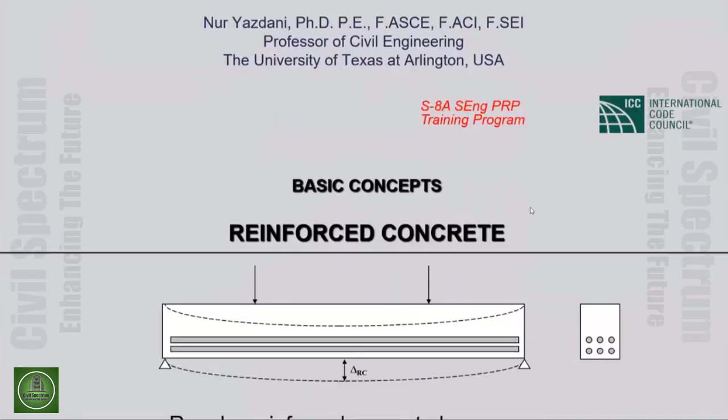So let's start with the very basic stuff here, reinforced concrete, as Dr. Ghosh may have been speaking about in the last few sessions. We know about reinforced concrete. What's reinforced concrete? Well, this is a regular reinforced concrete beam.

Typically we show simple supports, but in practice we rarely have simple supports, as you know. In my class teaching reinforced concrete, I talk about simple supports, with a roller and a hinge. One student asked me, 'Sir, I went to practice and couldn't find a roller or hinge in practice.' I said, listen, that's an idealization - we really don't have a roller or hinge in practice. We simulate that; for example, in a bridge we can have an elastomeric bearing pad that simulates a roller support. But anyway, for an idealized case, this is okay.

So here's a simply supported beam with 2 point loads, and here's a typical cross-section of reinforced concrete. As we know, these are typically steel rebars, with 2 layers here. The main reason for providing steel rebar is to negate the weak tensile capacity of concrete.

Under positive bending moment, as you can appreciate, there will be tension in the bottom of the beam and compression on top of the beam. So concrete is reasonably strong in compression, but quite weak in tension. And that's typical of a brittle material.

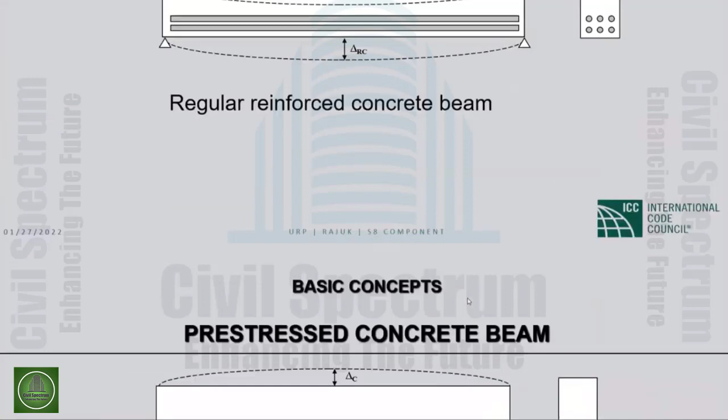So the difference from the previous slide, where we had a lot of deflection, now the deflection will be much less. And in some cases, there may not be any deflection at all—the beam may still remain in a negative moment situation. So why is that useful? Well, now, because of that pre-built camber, the deflection going down is much less when the load is applied. Bottom line is that we should be able to get quite a bit more capacity from this beam.

So why is that useful? Well, first of all, you can imagine that because of that pre-compression in the bottom of the beam, the concrete tension will be reduced. So the stresses in the bottom fiber of the beam will be significantly reduced because of the pre-existing compression. So compression in the beginning, and then applied tension—addition and subtraction will make it less.

So the tendons must be eccentric. Eccentric means that we don't want that compression to go to the centroid of the beam. You can, of course, make concentric pre-stressing, which goes to the centroid, which in a rectangular beam would be at the center of the rectangle. But it's much more effective if we apply eccentric pre-stressing. Eccentric means that you apply the pre-stressing off center from the centroid of whatever section we have—I-beam, T-beam, or rectangular section.

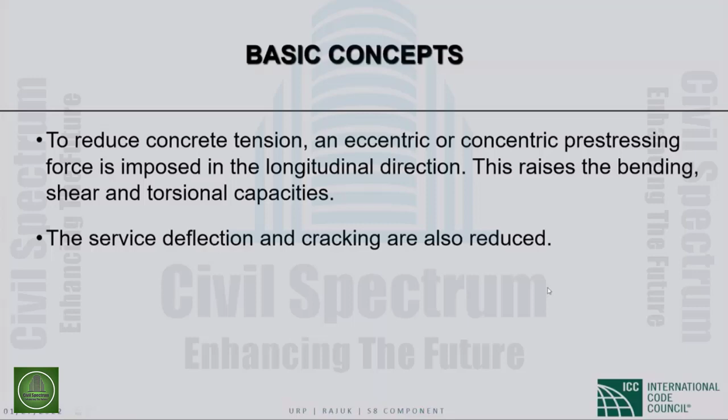In one shot, we can cast about even 10 beams, depending on the span of the beam. That's really effective. The strands are fed through the bottom flange, go all the way to the end, and are stretched. This is called pretensioning. Then the strand is let go after this concrete hardens.

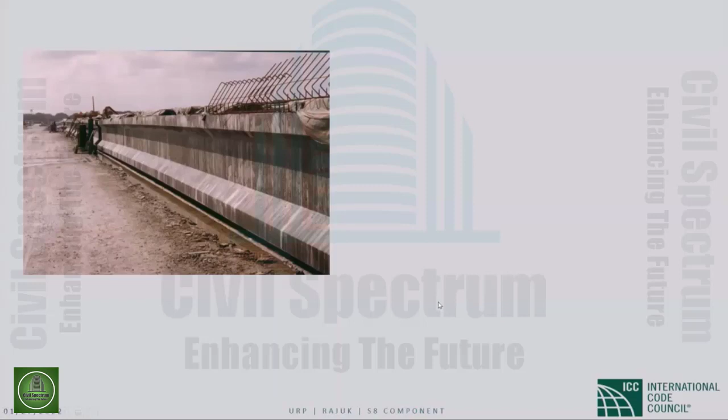So here is another beam. This, as opposed to the I-beam, is what we call a ledge beam. Why is it called a ledge beam? Because you can see the ledges on two sides, right? So you can see the pre-stressing strands here very clearly. If you look closely, you'll see these are not really one solid strand, it's made out of 7 wires. So typically we call it a 7-wire strand, and there are many of them here in the bottom flange.

This is used typically in a building where there are floor beams which come from the side and rest on this ledge beam. Very simple construction. The floor beams are simply supported, while these can be simply supported or they can be continuous.

So you see here, if I'm in a classroom, I would ask the students, what's going on through these pipes? Some of you may know, right? So these pipes are feeding steam onto the member. And typically once the steam is released, it's covered by fabric.

So this whole concrete is steam cured. What's the advantage of steam curing? Well, we know the hydration of cement is very important in concrete. The more the cement hydrates, the better the strength. Typically moist curing is done about 28 days, but steam curing can cure the same amount of cement in about 24 or 48 hours.

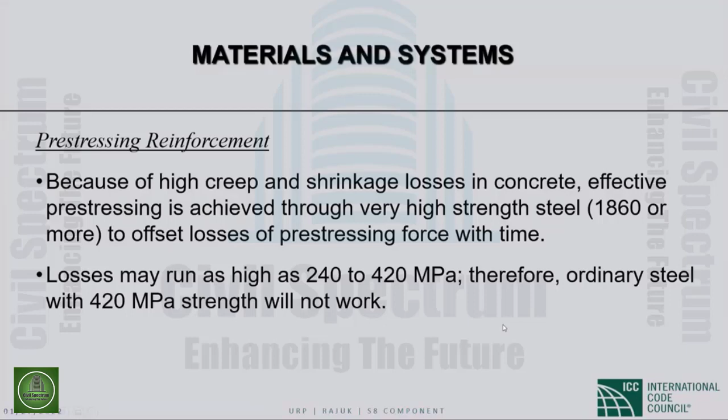So nowadays, the question is, do we have to use steel? No, not necessarily. As you know, composites are available now. There are reinforcing bars made of CFRP or GFRP, and there are also prestressing tendons available in composite.

So the advantage is that the composite will hopefully never corrode. They cannot corrode because they are non-steel. There are some thoughts that they may degenerate with time - the composite may degenerate, but that's a different issue. So the corrosion potential is wholly removed. One advantage of the composite reinforcement is the cost, the life cycle cost, right?

We talked about durability and sustainability of the structure in the previous slides. So we should not really look at the initial cost of the structure. If you think about the cost of steel rebar versus composite rebar, well, of course, the steel will be much cheaper because steel is widely used and widely produced.

With time, hopefully composites will take hold and the price will go down. Composites are quite a bit more expensive than steel right now, but if you look at the life cycle cost of the structure, it's a no-brainer. In an aggressive environment, if you have to repeatedly intervene with rehabilitation, repair, inspections, or even replacement, that may not be cost effective in the long run. So you need to look at the cost benefit ratios, and from that angle, composites make sense.

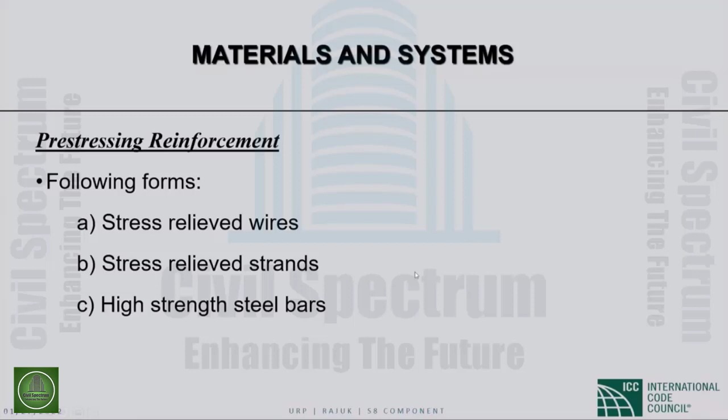But there's something that the designers or owners can decide, what kind of steel to use. Just enough to say here that composite pre-stressing steel is available for us to use.

So I talked about the two types of pre-stressing systems: one is pre-tensioning and one is post-tensioning. There are structures that are hybrid, where the structure can be partly pre-tensioned and partly post-tensioned. I will talk about that a little bit later on. Or the structure could be wholly pre-tensioned or wholly post-tensioned.

Sorry, somebody's calling on my Teams phone here in the office. I apologize for that.

So here are some points on pretensioning. As I mentioned before, we have fixed anchorages, bulkheads on the sides. Before the concrete is cast, we place the tendons there, then we stretch it, and then we anchor it against the bulkhead. So you can imagine that the tendon is still in tension.

It is normally done at a precast yard, which is really cost effective in terms of the management of casting, storage, and transportation. Or for large jobs, it can be done on the site. It's not unusual in the USA for large bridge projects to have a temporary precast yard set up at the bridge site, which really cuts down on the amount of transportation needed.

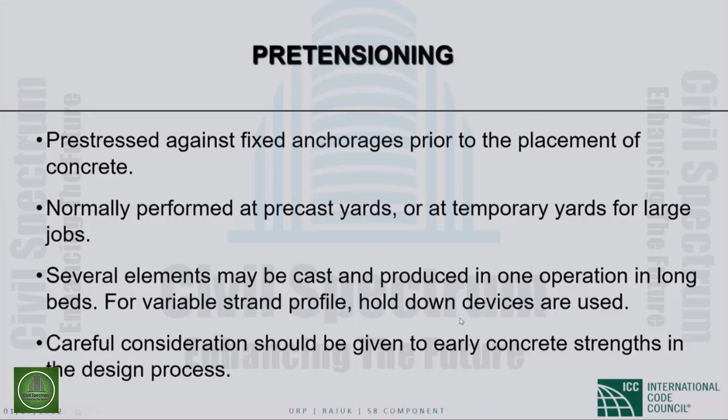There is no meter. We just measure the elongation of the tendon, and there's a calibration chart. If this is elongating by 500 millimeters or whatever, then what's the corresponding force in kilonewtons? That's known from the manufacturer. So that's what we do, it's a very simple process.

I have some photographs, I don't have them here in this lecture. I probably will include them in my bridge lectures later on, where you can see how people are measuring this. Now, this is a very, very, very risky practice.

I shouldn't laugh, because people have lost fingers operating this jack. Suddenly a strand breaks, and strands can be defective due to manufacturing defects. So this flies at high speed, causing injuries to people standing nearby. That's a very risky practice, staying close to this. I'm sure precasters take proper precautions, and there are liability issues that are addressed.

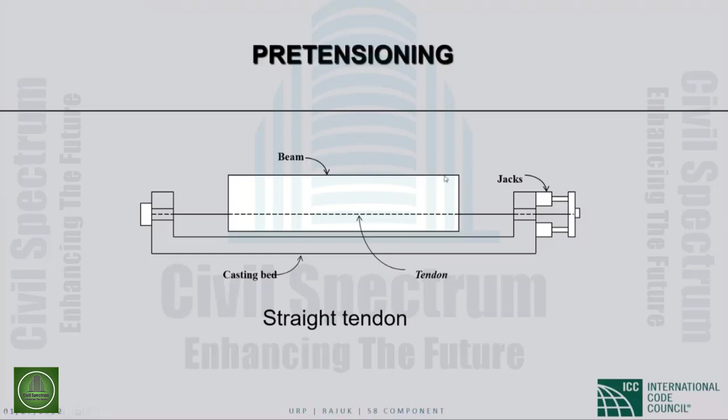This is easily done in a precast yard. It can be difficult to do in the field, but in a precast yard, it can be easily done.

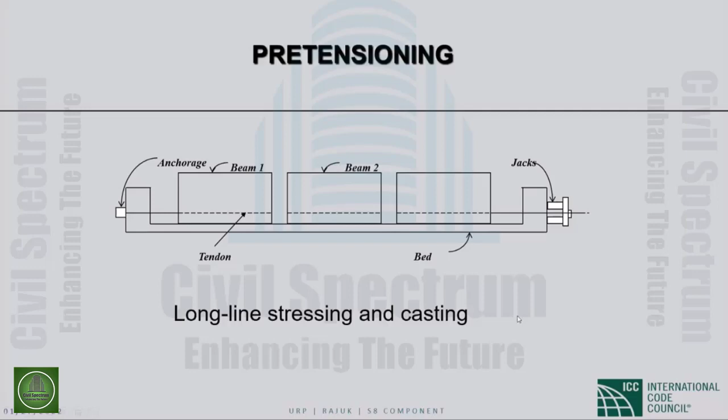As opposed to pretensioning, post-tensioning is done on hardened concrete. So instead of having the strand bonded to the concrete, what we do is place things differently. Let me see if I can move this around a little bit so it doesn't obscure our view.

Strands are placed in ducts. So what we do is place empty ducts, like a conduit. It can be made of steel or plastic. These are placed in the formwork ahead of time, before the concrete is poured.

After that, we apply the concrete, casting it around the duct. You can imagine there's an empty duct within the concrete, a void in the concrete, and we can even vary the profile of the duct to conform to the moment diagram. Once we apply the concrete, it hardens.

Then we feed the strands through the duct, all the way from one end to the other. We anchor it on one side, and apply the pre-stressing from the other side. There are grouting ports into the ducts, and we typically grout it, injecting grout from one side. The grout comes out the other side, so we know the conduits are fully grouted, giving us the bonding we desire.

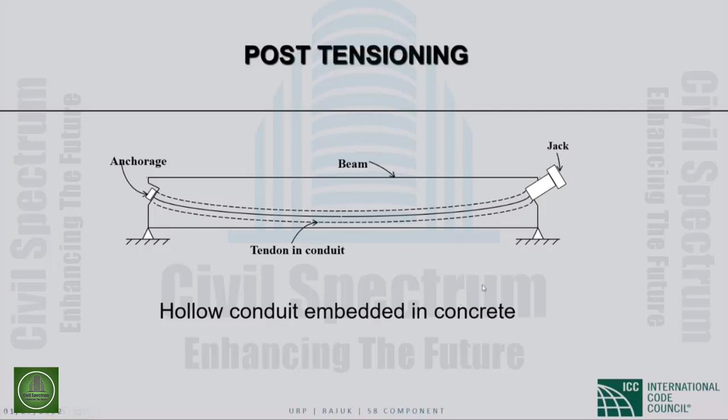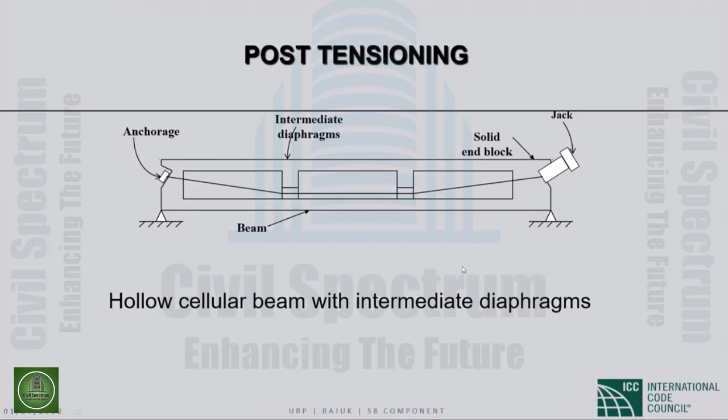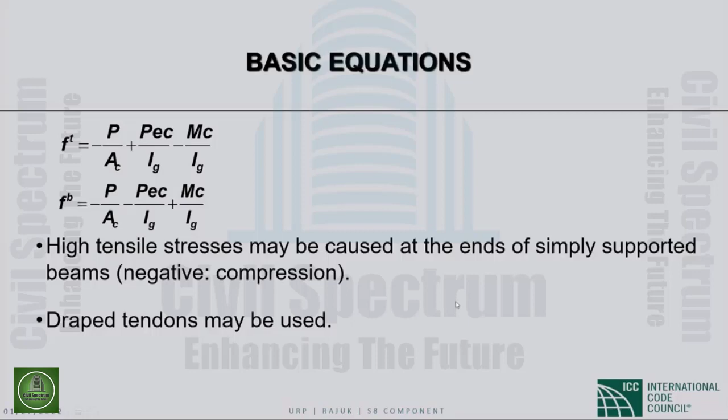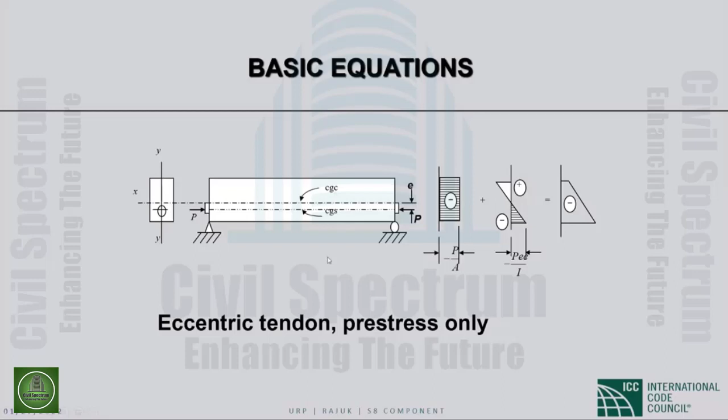These will again work against each other. It will reduce, and these will add, so this will be a kind of trapezoidal stress distribution on the section. This is only pre-stressing, nothing else applied, which is hypothetical because you can easily imagine when the pre-stress applies, the member cambers up and the dead load self-weight takes effect immediately. There's no way to avoid that, especially if you're supporting at the end, so it's instantaneous—the moment pre-stressing is applied, there will be downward load from the self-weight.

Which may not be desirable, but we can accept some limited tensile stress at the bottom of a pre-stressed beam. This is the condition which happens after pre-stressing transfer to the concrete beam.

Now let's think about the life of the structure. I always believe in looking at the sequence of loading on the structure. It's very important. Sometimes as a designer, we forget that the loads are not applied at the same time. There can be lag in the loads applied.

So let's think of the life of this pre-stressed beam. It has been cast, and it may be lying somewhere in a precast yard on the side. It's not unusual to sometimes have them stacked up one on top of the other, because in the yard they're trying to save space. If it's at the site, it's probably being placed in service. So from the precast yard, we'll be moving them to the job site, at the building or a bridge, or at the temporary site, we'll be putting them up.

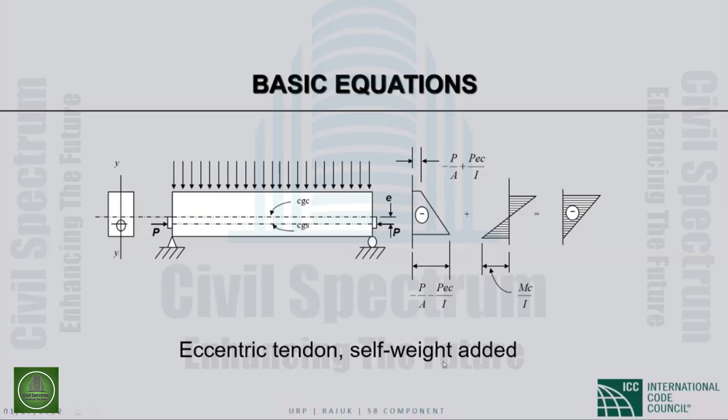So here is that beam I showed you before. Now it has rained, which is helpful for the curing, though it probably doesn't need any because it has been steam cured. So we can see again the long line casting here, and we see several strands.

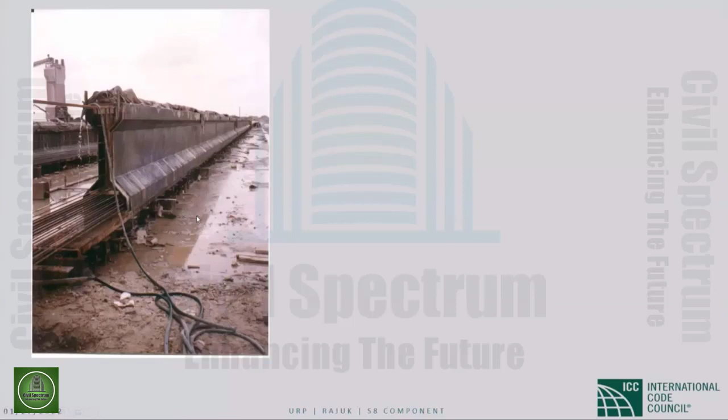I like to point out that this is very important, the placement of the steel and the constructability of it. ACI addresses that, as you know, through providing covers, minimum covers for concrete, and then also providing clear spacing between rebars or layers of rebars. Now, we should not use the same values for pre-stressing. They're quite different, and I like to point out that in ACI there are separate values for pre-stressed concrete, which is different, most likely lower than reinforced concrete.

So now coming back to the equations. After the beam is put into service, we consider a total moment. So as I mentioned before, it's in service. This is a condition where the beam has been placed into service. Everything has been placed. The structure is complete.

So the moment on the structure now would be the summation of all the moments. This is the external moment applied, not the pre-stressing moment. So the total moment would be the dead load moment, or self weight of the beam or the slab together—this is the superimposed dead load moment—and this is the live load moment. So it all depends on the support condition of the structure. That will dictate the values of the moments, and then also the load factors that have to be applied for concrete design.

So the load factors are interesting. I think Dr. Ghosh may have covered that in the previous sections of this lecture series. The load factors do not depend on whether the member is reinforced concrete or pre-stressed concrete—that only depends on the type of load you have. And as you know, there are load combinations in SEI, which are statistics based. We typically use those factors and wisely look at the load combinations we have to use.

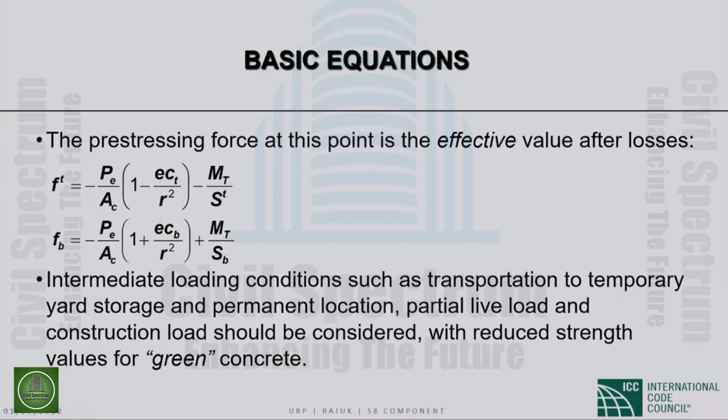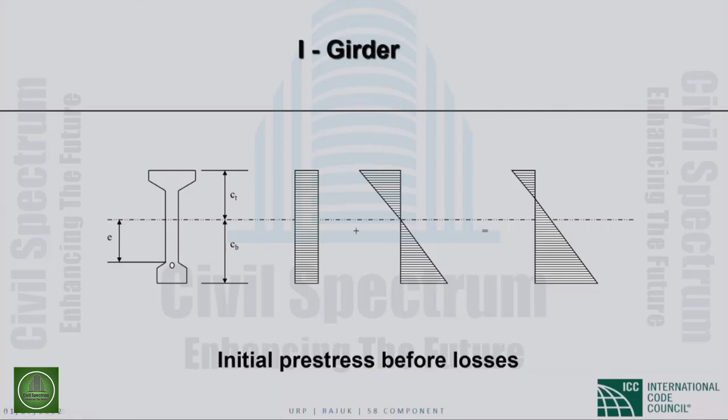Now this is service load at effective pre-stress. So the pre-stress has been reduced by the losses, and then we apply the other loads on the structure. Suddenly we have a little bit of improvement in the condition. This stress has been reduced a little bit, and this stress has been also changed. That's why ACI applies stress limits. There are two kinds of stress limit: one is for the initial condition, and one is for the service condition. They are different, and ACI indirectly recognizes these kinds of situations through those stress limits.

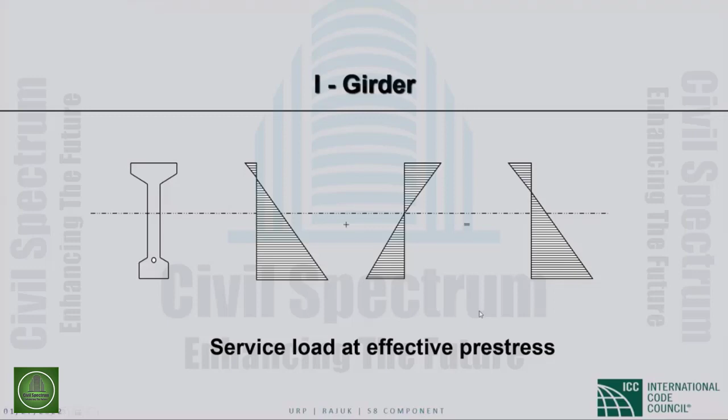So now we can fall back onto ACI code 18.4. If you have it, you can look into the ACI code if you have a copy, or you can look online. I found ACI 318-08 metric online. Initially I was trying to buy it from ACI and it was quite expensive, so I got it kind of free. Google is our friend, right?

So here is the stress F prime CI, as I mentioned before, compressive strength at initial pre-stress. Please be familiar with this nomenclature, this subscript. I means initial, and F prime C is the compressive strength at service. It makes sense, right?

ACI gives us the limit. This is very important - these kind of stress limits are not in regular reinforced concrete in the ACI code. They are only in pre-stressing because pre-stressing can drastically change the stress situation depending on the support condition and the eccentricity. So if the specified stresses are exceeded, ACI asks us to use bonded auxiliary reinforcement. We must provide additional steel reinforcement, mild steel, which is supposed to supplement the pre-stressing steel and address all these unintended stresses that we need to control in pre-stressed members.

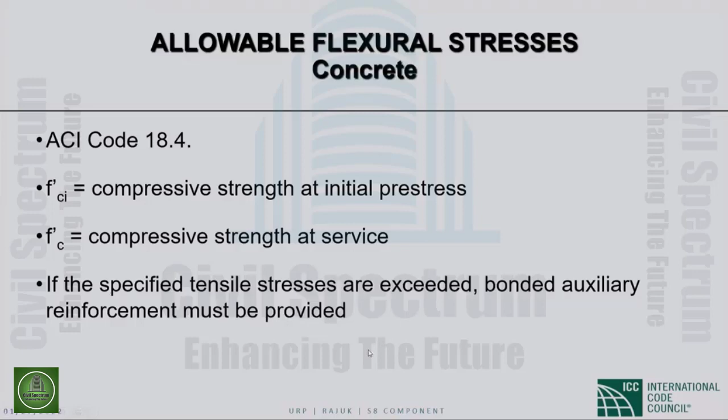So these are the stress limits. By now you understand the difference between transfer and at service load. To repeat myself, transfer means initially when the pre-stress is transferred, and at service means when all the loads are applied and the member is in service. ACI does not recognize intermediate load cases, as I mentioned before.

So in compression, the limit is 0.6 F prime CI anywhere. If you have a compressive stress, this is the limit, and F prime CI is the initial concrete strength. We collect cylinders during casting, regardless of stage, and then test some of them initially, depending on when the pre-stress is released - if it's steam curing, we've been doing it at 2 or 3 days. Then we test the rest of the cylinders at service, which would be 28 days typically.

At the end of simply supported members, this is the limit, 0.7 F prime CI. Now these are in metric, in megapascal. If using the US system, that would be in KSI, with different factors applied.

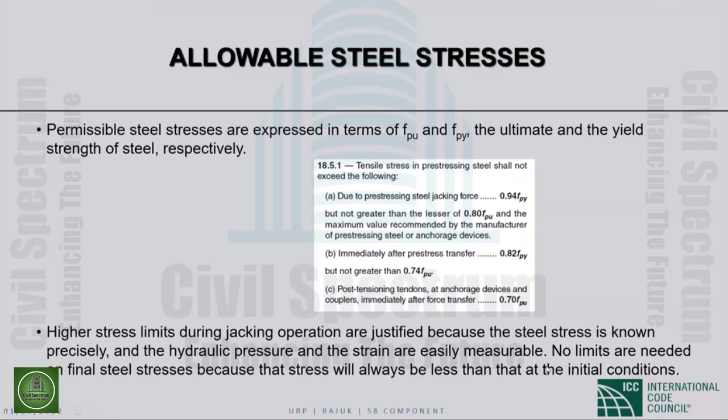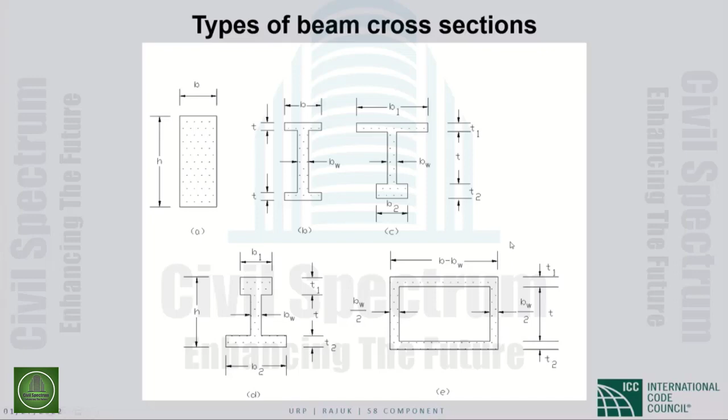Now, when you start designing pre-stress concrete, sometimes you grope in the dark. What shape should I use? Should I use an I-beam, a T-beam, or a double T-beam? A one-way solid slab, hollow core slab, or two-way solid flat plate? I'm sure you know the difference between a one-way solid slab versus a two-way slab - I think Dr. Ghosh may have already covered that.

Hollow core slabs are precast slabs where the core is hollowed out. Very common in the USA for office buildings and hotel buildings where you try to reduce the self-weight. One issue with concrete structures is the dead load - self-weight is quite high compared to steel or timber. So anyway, we can reduce the self-weight, and it's economical for us. Flat plate means, as you know, there are no beams applied, though there may be column capitals or stuff like that, and there's also flat slab.

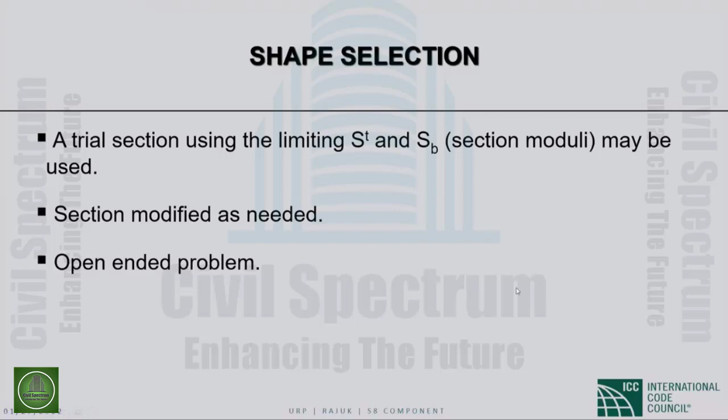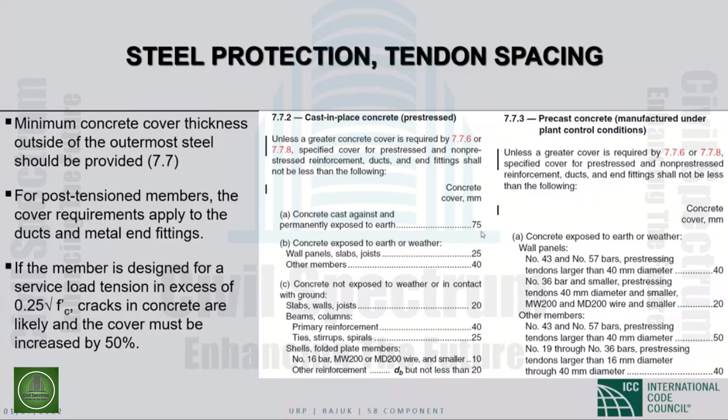This cover is one part of the durability aspect of the concrete, but then the minimum spacing is also important. The clear distance between bars and strands should be the diameter of the bar or 25 millimeters, whichever is larger. That's also important because of the prospect of congestion of rebars and difficulty in placing concrete, which can cause honeycombing and strength and durability issues.

So at the end of pretension members, the spacing requirements are increased by ACI. These are all ACI provisions, I think this is from section 7.6 here. So please pay attention to that, and if you have the ACI code, you can look at those pages.

And if you are using bundling bars, bundling of tendons - 4 tendons or bars is permitted, not more than that. That's probably more prevalent in post-tensioning than pre-tensioning.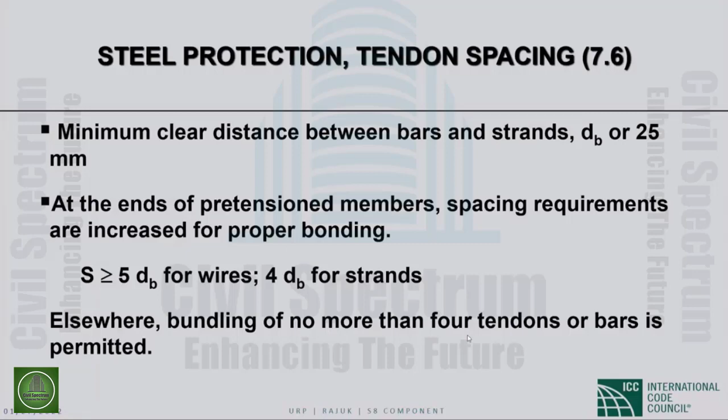It's quite common now in the USA - there are very long spans being built with this kind of bridges. Also, I like to point out that you can provide curvature of the structure sideways by using the match casting of the segments. Building-wise, well, here is a common construction.

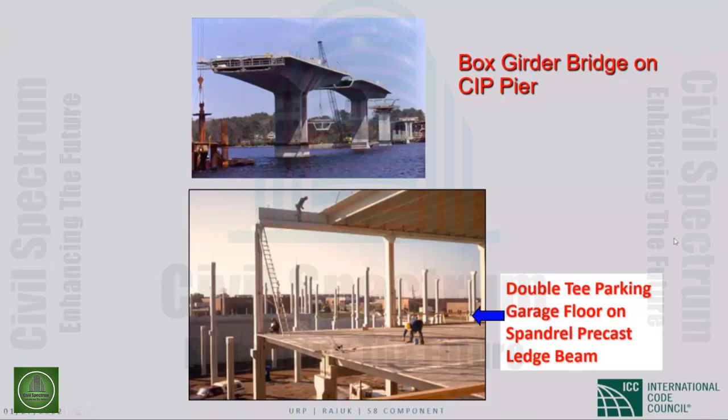Very fast construction - there are corbels on the column which transfer the load from the ledge beams onto the column. ACI, as you know, also has provisions for bracket and corbel design. Then the load is transmitted to the foundation. Very fast, very economic construction.

Now let's change gear here. With the limited time we have, let's look at the loss of pre-stress. As I mentioned before, losses are pervasive - you cannot avoid loss. So if you can't avoid something, you have to live with it. Pre-stressing will lose stress over time.

Approximately 5 years. Studies have been done and ACI has curves that show that after 5 years, the losses level out. If you provide for that in the effective pre-stressing, you should be in good shape.

Now, I like to point out that although ACI and AASHTO have detailed calculations for the different components of losses, and you can spend all day figuring out those losses, they are very difficult to understand because there are many interrelated issues. For example, there is humidity in the air, temperature effects, and interaction between them and the camber. It all makes it very difficult. And camber is very hard to predict. We can try to predict camber, but it's very difficult at the end knowing what the real camber is. I'll talk about camber in a future slide here.

So most of the time, we end up using reasonable lump sum loss estimation. It's not accurate, but it's conservative. Of course, if you have an efficient computer program, you can do the detailed loss calculation pretty easily, but we can get away with the lump sum loss also with reasonable accuracy.

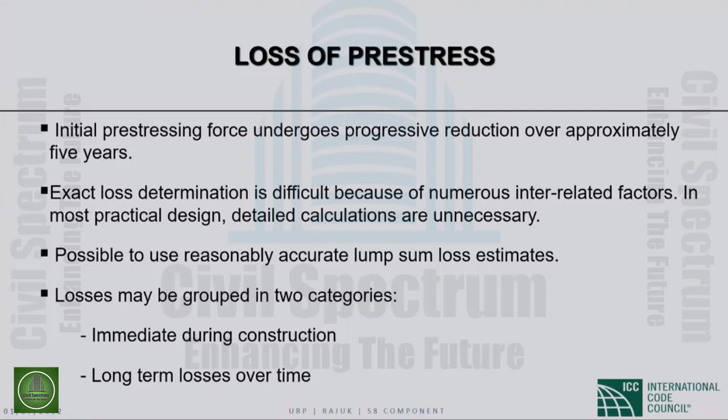ACI code does not have lump sum loss estimation. There's nothing there. There are other publications which address that. AASHTO has a table for lump sum loss. The ACI code is for building design, and AASHTO specifications is for bridge design, so we shouldn't intermix between them. And the Post-Tensioning Institute in the USA also has published such tables. So it's really up to you how you want to handle the pre-stress loss calculations, but these are guidelines that we can fall back upon.

So let's talk about the individual losses. First one is very simple, elastic shortening loss. This is instantaneous, immediate loss. We have the member, the pre-stressing is applied, initial pre-stress, note it's immediate. Then the member shortens - of course the concrete will shorten, right? It will be compressed because of the pre-stress applied.

So that gives us the basis to figure out how much is the loss. That means how much is that stress that the strand is giving up with the deformation, and how much loss is being applied.

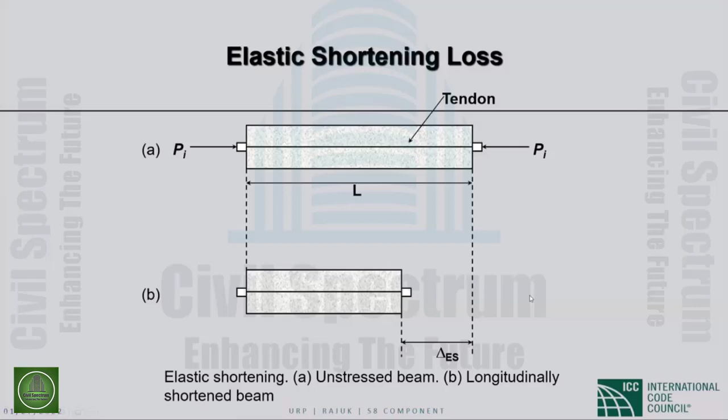Relaxation loss, on the other hand, you can easily imagine. If I hang a stretch of strand with a certain force, after some time, it will give. It's a property of the steel. With time, it will give. It will relax, and that's what is called relaxation loss.

This is the AASHTO equation for relaxation loss. FPT, the factors involved - I think I showed this in an example that we'll talk about later on. So I'm trying to just give you a flavor of the different losses and what they mean in summary form.

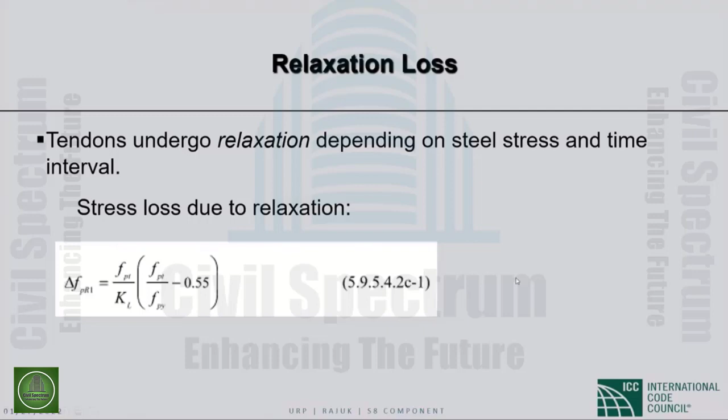Creep loss, on the other hand, is due to concrete properties. Concrete has two kinds of properties that affect the loss: one is shrinkage and one is creep. As you know, creep is the effect on concrete of sustained loads. So if there are loads on the concrete for a long time, concrete will give, and that will cause loss in the steel as well.

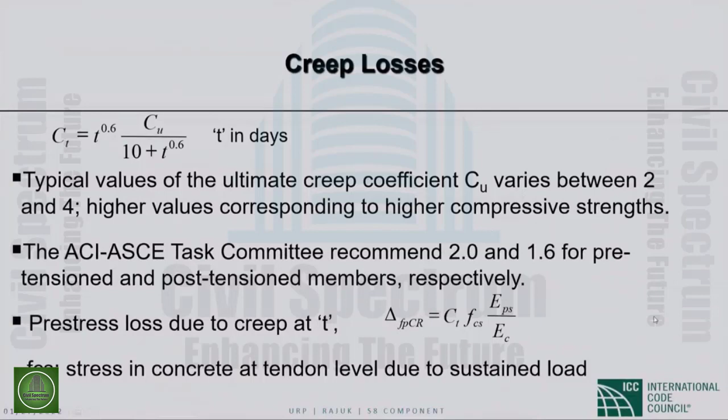So here's the equation again. Typical values of Cu given to us are between 2 and 4. The higher the strength of concrete, the higher the value. So if you're using high strength concrete or high performance concrete, which is open to definition, we tend to use the higher value. But for lower strength concrete, we'll use the lower value of 2. The ASCE task committee, which is not in the ACI code, recommends 2.0 and 1.6 for pre-tension and post-tension structures.

So after we figure out what factor to use, then we figure out the creep loss, which is this value right here - a very simple equation. The actual time-dependent creep factor, FCS, is the stress in the concrete at tendon level. You have to go back to those stress equations and figure out what the stress is due to only sustained load at the tendon level. Then, as you know, these are well-known values. EC is the modulus of elasticity of concrete, which ACI gives us an equation to use. And EPS is the modulus of elasticity of steel, which is pretty constant across all different kinds of steel.

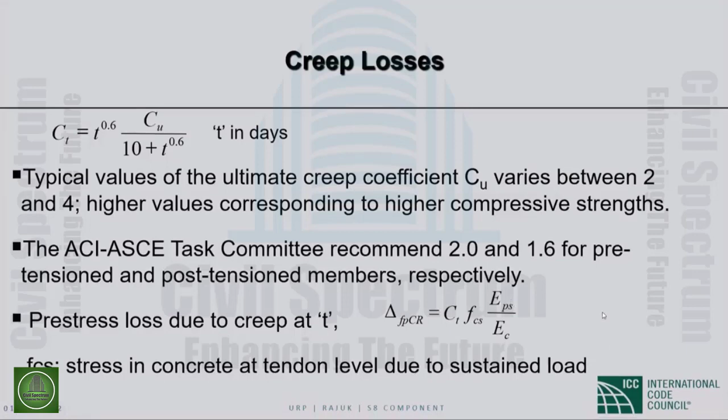Shrinkage loss - it has been shown that approximately 80% of shrinkage occurs in the first year. Shrinkage means that with time, it's a property of concrete. We cannot avoid it; it will shrink. Some concrete will shrink more, some will shrink less. It depends on water cement ratio and other factors, humidity, temperature, environmental conditions. There's nothing wrong with shrinkage, but if you restrain that member, the concrete is not allowed to shrink, and as a result you may end up with shrinkage cracks. In the USA, we see this all the time in bridge decks - even new decks have these transverse cracks. So cracking is nothing wrong with that as long as we manage it, and that's why we provide shrinkage and temperature steel in slabs and decks.

So that will cause loss. How much loss? This is called the concrete shrinkage strain - it's sort of given to us. The values are here, typically varying between 500 to 1000 times 10 to the power minus 6. This is strain, so there's no unit attached to it. Again, that same task committee recommends 780 times 10 to the power minus 6, which you'll note is about the midpoint between these two. So I'd suggest don't spend too much time on that - just use the approximate value. And PCI stipulates a value of 820 times 10 to the power minus 6. So it's really up to interpretation which value you want to use.

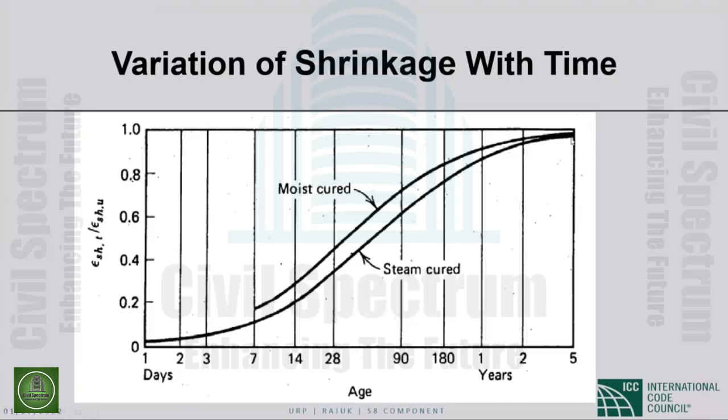So these are the shrinkage strain ratios at time T - this is the ultimate shrinkage strain. What you do is figure out what ultimate strain to use based on the previous slide, then T is in days. So this simple equation - if you're using moist curing after 7 days, this is the equation to use. This gives you the actual time-dependent shrinkage strain at that time. This is for steam curing - if you're using steam curing, this is the equation to use. And then after you figure out that strain, it's a simple matter of using Hooke's law, multiplying it by E of the steel, to get the shrinkage loss.

So there are ways out to the complicated formulas - there are simple equations that can be used.

Okay, now friction loss is common for post-tensioning, not for pre-tensioning. Let me explain. What happens in friction loss is that you have this duct in post-tension members. After you place the concrete, you stretch the steel and the steel is going to slide against the duct, right?

You think it's in the middle point. It may not be in the middle point, especially for curved ducts. That can be an issue. So friction loss will happen because of the sliding effect, and that's taken care of by the friction loss.

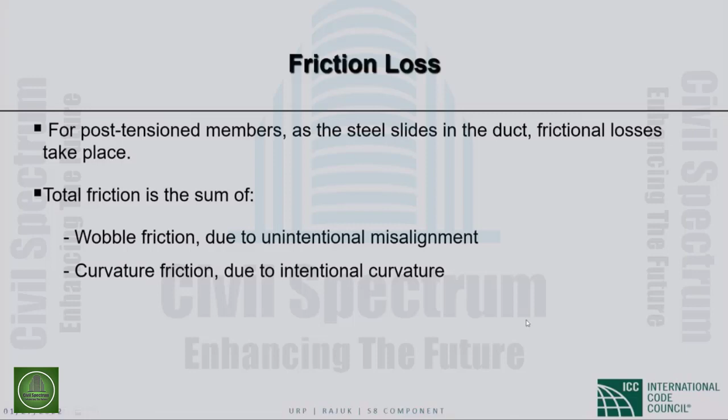This is, in my judgment, the most complicated one to figure out. If it's pre-tensioning, you don't have to worry about it. This doesn't happen, so please don't find friction loss in pre-tension members. But for post-tensioning members, you have to figure it out and factor it into the total loss.

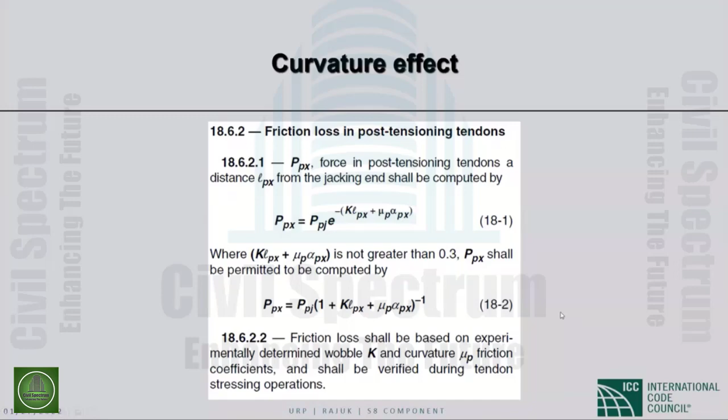The next one is called anchorage slip loss. So think about that. You are stretching these post-tensioning members, anchoring on one side and jacking from the other side, then anchoring that on the other side as well. So the anchors are not perfect. There will be some loss, some slippage within the anchorage.

So what we do is we try to estimate that, and that will create loss in the member. We factor that into this loss. Manufacturers will give us that value. How much is that value? In the example I did, I used a 3 millimeter slippage allowed. Even in pre-tensioning, that will happen because even within that casting anchorage, there will be some slippage.

So here's the equation, very simple. If I can estimate how much anchorage slip I'm allowing or happening, which I mentioned was about 3 millimeters, depending on the pre-stressing force, and if I know the length of the strand and the E value for the steel, I can figure out the anchorage slip loss. Makes sense, right?

So here are some tables I gathered for you. If you don't want to go through the trouble of finding the detailed losses, this is from the Post-Tensioning Institute, PTI, a very well-known organization in the US. They have published this in their post-tensioning manual.

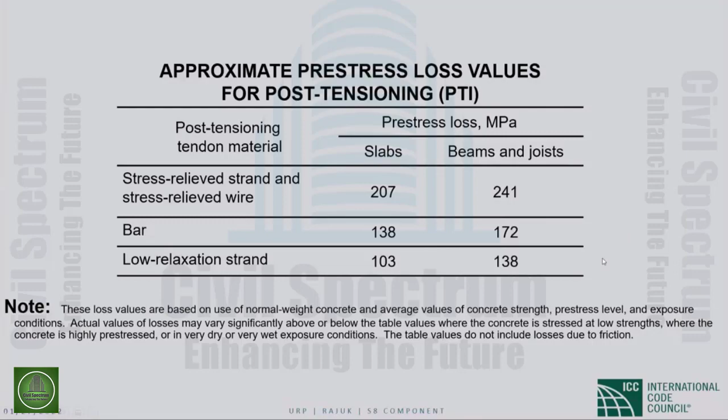Now, one thing I like to point out at the bottom is that they do not include friction loss. So if I use these values, I must add friction loss to this from the previous equations, and then I will get the desired total lump sum loss.

These are AASHTO lump sums, so these are for bridges. Sorry, let's go back here. So this is from AASHTO. It's kind of, again, approximate. So total loss depends on the concrete strength, and there are two strengths given. Nothing is given beyond that. I don't know if you can extrapolate that or not.

So if I have pre-tensioning strand, this is the total loss, 310 megapascal. For post-tensioning wire strand, there's no value given here for pre-tensioning for this concrete. For post-tension, there are two values given, and for bars, these are the values given. Again, friction loss is not included, so AASHTO says you must figure out the friction loss and superimpose it onto these losses.

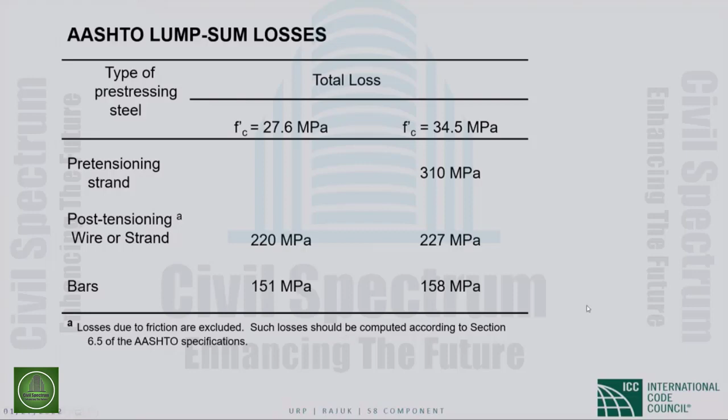So now we jump into flexural strength, very important, right? We do all the loss calculations, we do the stress checking, the member is fine, but how do we know the member is safe?

So typically for beams, we check the flexural capacity and the shear capacity. Now you may have to do the torsion capacity. For compression members, the axial force capacity or beam column capacity and so on.

So this is the equation from ACI. What we do is we use the same equation that we use in reinforced concrete, which is, as you know, AS Fy or Fs times D minus A over 2.

So this is the reliability equation, which Dr. Ghosh, I'm sure, has covered in the previous lectures. So we just modify that. Instead of AS, we use APS. And instead of Fy, we use the actual stress in the tensile steel.

So ACI gives us these equations in section 18.7.2. So if you have bonded tendons, we use this equation. It's kind of complicated, but I have the example which I've shown the application of this, and I won't spend too much time on this here.

This is the omega equation. This is the omega prime, which is based on compression steel. If you don't have any, you can ignore that if you don't have any compression steel. And gamma P is based on the ratio of FPY over FPU. And if you have compression steel, that can be factored into that equation.

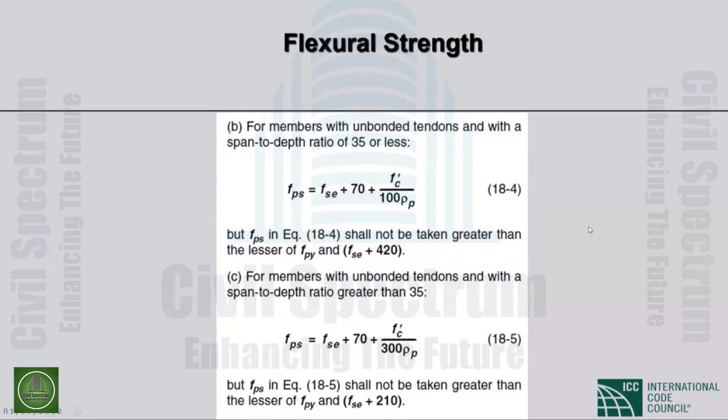So the essence of flexural design in pre-stress concrete is that, as I mentioned before, you figure out the member proportion. That means the size, the shape, the width, and the depth based on the stress limits, using the allowable stress method. Compression stress, I showed you the limits before. Tensile stress, I showed you the limits. And then you select the cross section, the pre-stress force and eccentricity, to make sure that you're within those limits. We cannot violate those limits.

So one thing I like to point out, when you do allowable stress design, this is not LRFD. So please don't use load factors. No load factors, no phi factors in this calculation. This is service design. Just use the actual loads, similar to what we do when we find deflections for reinforced concrete members. We do not apply the load factors.

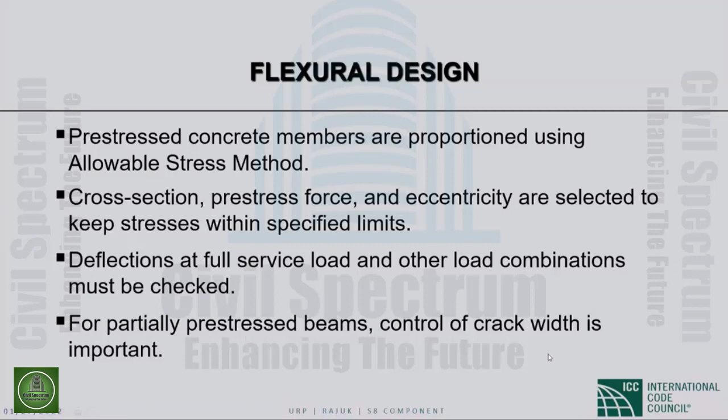Shear design is a different ball game. As you know, shear design is quite different. We are moving into, ACI is moving into, strut and tie design. ACI allows that. AASHTO allows strut and tie design for shear and torsion, or even for whole beams. So this is all there, but I'm just going to fall back on the '08 edition. We didn't have strut and tie at that point.

The main problem with diagonal tension is the diagonal cracking, right? As you know, the combination of shear and bending will give you diagonal tension. And because of the pre-stressing applied, the crack in your beam will be flatter, which is a good thing. Why is that a good thing? Because if I have a 45-degree crack angle for pure shear, and if I apply the normal stress from pre-stressing, it's going to be flatter. Flatter means that more stirrups will cross that diagonal crack line, and I have more shear capacity, right?

So if I have an inclined tendon, this is interesting. As you know, VC is the concrete shear capacity, V is the total shear, and this is the component from the tendon slope. So if I have a 10-degree slope, this will reduce the shear. It's kind of small, so if I assume VP to be 0, I'll be conservative. If you have a really steep profile, you can use that to your advantage in reducing the number of stirrups or increasing the spacing that you need.

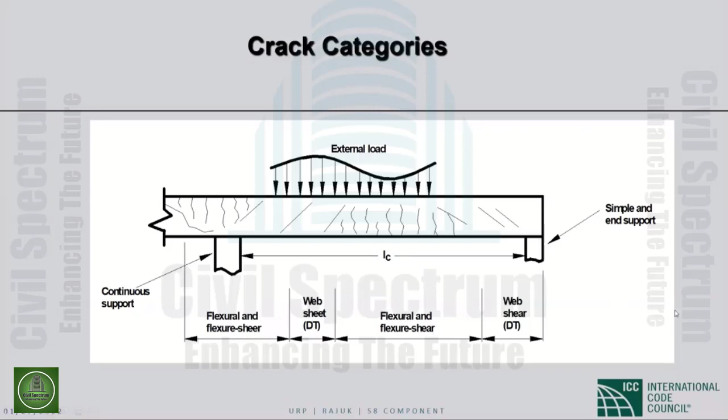In the ACI nomenclature, V sub D stands for self-weight shear, this is external shear. V sub P stands for pre-stressing shear, as I mentioned before. And VCI is the total shear producing flexure shear failure. So here is the upper limit. Typically, I use D sub P, which is the effective depth to the pre-stressing steel. If I don't know much, I just use 0.8H, which is the upper bound for this calculation.

FD is the flexure stress at the bottom face from self-weight only. FPE is the compressive stress at the bottom face, axial and bending effects of the eccentric pre-stress force included, so that's all inclusive at the bottom face. These are the equations straight from the ACI code.

The critical section, as we know, is d/2 from the face of support. Critical, that's typical for shear design. As you know, ACI allows us to come out a distance d/2 and design for the shear at that point, which should be less than at the support section.

Here is the VCI equation, the flexure shear equation, shear capacity of concrete. I'm sure you know what the lambda factor is. Lambda is the effect of lightweight concrete on the strength of concrete, so ACI gives us values if I use lightweight concrete. And then F prime C, usual BW is the width of the web, and so on. And then the moments are factored in here.

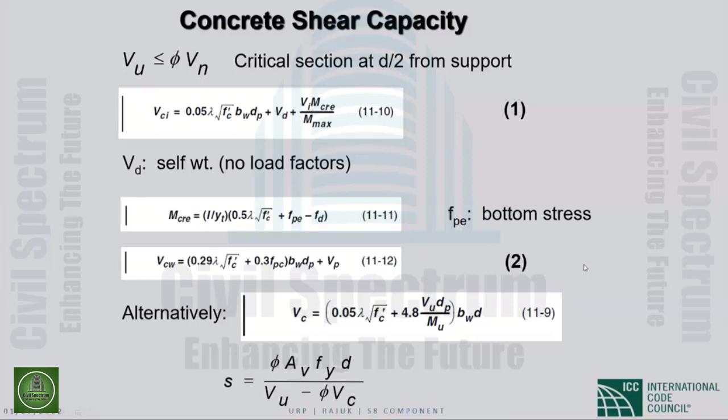Okay, so spacing limit for shear reinforcement - this is different again for pre-stressed concrete. The maximum spacing should not exceed d/2. This is typical for non-pre-stressed, but for pre-stressed, it changes to 0.75h, where h is the total height of the pre-stressed member in millimeter, or 600 millimeter. It's very simple to understand and apply.

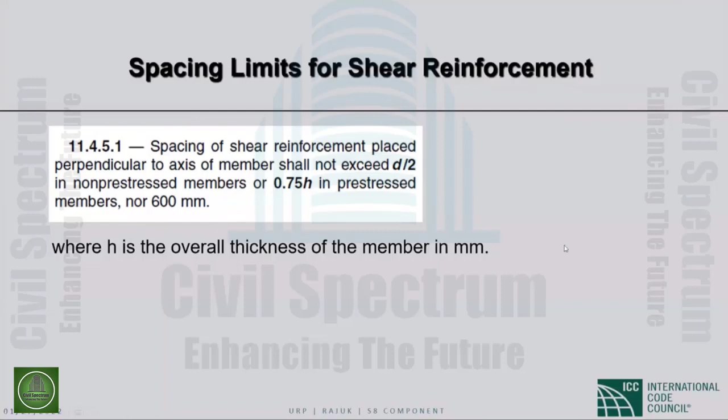Just want to show you the inside view of that I-beam I showed you before in the casting. I showed you the shear steel here. You can see them clearly, the stirrups jutting out of that I-beam. These are the steel forms I showed you before.

These dowels serve a big purpose. They give you the shear capacity because these are vertical stirrups. As you can imagine, that's the web of the beam before casting, and they stick out. This is a bridge girder that we will transport to the site, and the deck will be cast on top.

When it does, these will get embedded into the deck, and that will conveniently give us the composite action between the deck and the girder. That's very critical. If I use AASHTO provisions for bridges, we use 100% composite action, and that must be ensured, although in practice, I've seen that no bridge is 100% composite.

Okay, I showed you that diagram before. This is another view closer up. You can see the shear steel very closely spaced at the support, and we can increase that over there because the shear is maximum near the support of that beam.

Even the ledge beams can have stirrups, and typically the ledge reinforcement will stick out from the main beam on the ledge, and that will provide for any kind of shearing activity or punching to this ledge that I showed you before.

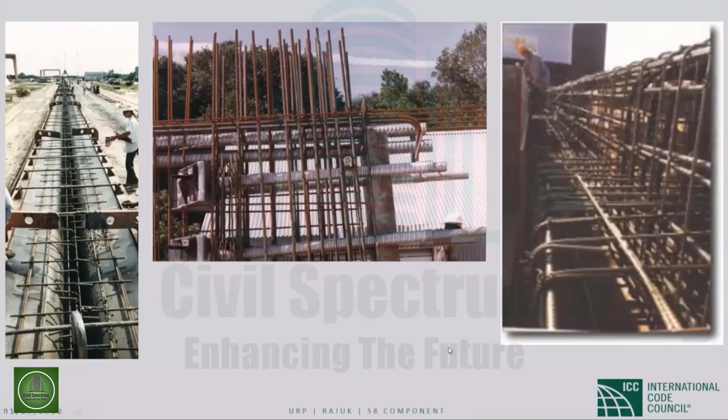We're not done with shear reinforcement, okay? We need to look at minimum shear reinforcement. This is very similar to reinforced concrete, but their values are different. The equations look the same.

This is true when VU exceeds half of the shear strength, phi VC, typical for reinforced concrete as well. So this is the AV minimum for pre-stressed concrete. Simple equation, but not less than this value here. I'm just going to breeze through here because you can always fall back upon these numbers. I've shown the example where these are applied.

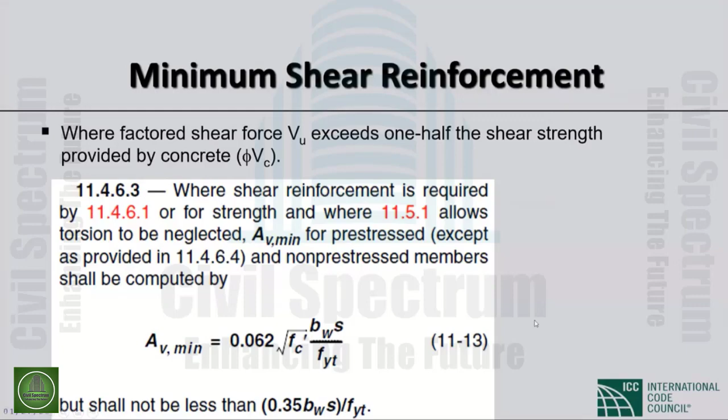This is ACI chapter 11, which deals with both shear and torsion. More minimum shear reinforcement provisions—shear reinforcement is required, and torsion is neglected. If torsion is not neglected, then this is the equation to use.

So you need to do a judgment. Should I neglect torsion, or should I consider that? Then you have to use the proper equation. And all these terms should be well known by now, right? What they mean.

So I talked about composite construction, and I firmly believe in that. If I have an I-beam like this, it's useless because I must apply the load, and the live load is only applied through a composite deck or slab. Now, if I make it non-composite, that will not be too useful because the deck will be just a dead load or live load applied on the beam. The beam will still be asked to carry all the load.

So composite construction makes sense. This is the hollow core slab I mentioned before, which is pretty common in the US. We hollow out the core by removing this concrete from the neutral axis. It has minimal effect on the strength of the slab. Then we can use a cast-in-place topping on top of that.

This is a single T with a cast-in-place topping. This is a double T, as I mentioned, with a cast-in-place topping. And there are many, many variations of this kind of composite construction. They are very useful for buildings and bridges.

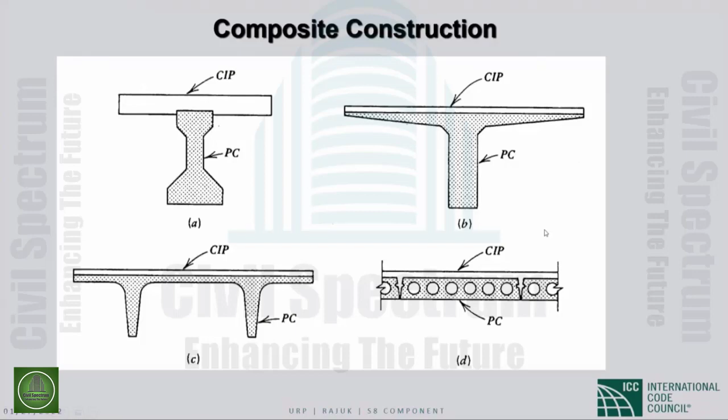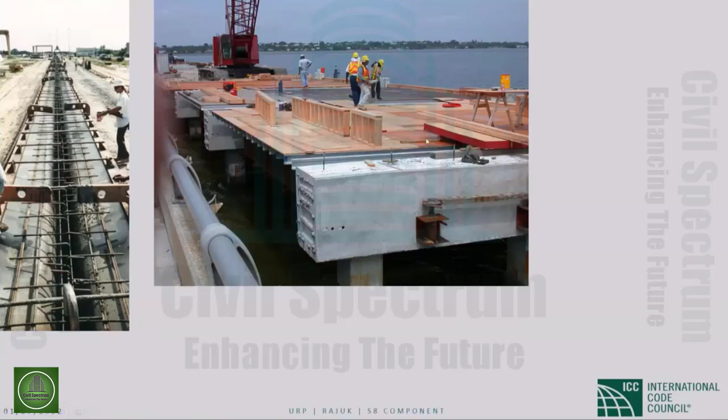Showed that before. Showed actual construction, composite construction here. We have the beams pre-stressed. I see this is a bridge, this is a bent cap, and then we have the deck being cast on top of that, okay? So by using the dowel bars from here, that will become composite. Another view of the composite construction.

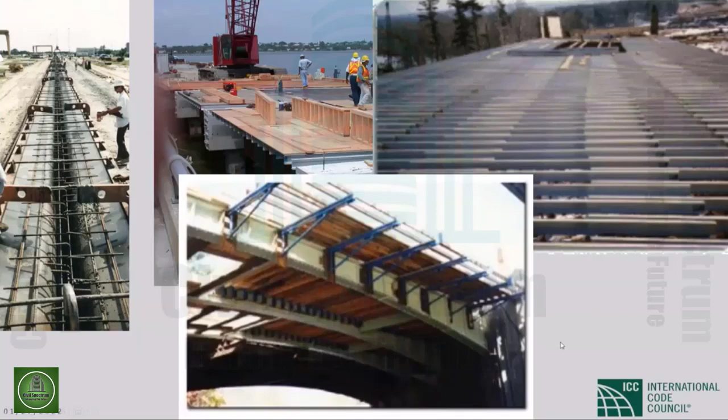So I talked about the stages of loading before. Here is another view of a typical bridge that we use in the USA. This is precast I-girders, the dowel bars sticking out. You can see the deck, the cast-in-place deck. This is precast, that's cast-in-place.

And we are using this innovative system called precast panels. So this is pre-stressed, precast, simple slabs. We place them on top of the I-girder, then with the dowel sticking out, we cast the concrete. No need for formwork. Very useful for over traffic or over riverways or channels. There's no intervention at all, very fast construction.

By allowing the precasting to take over, we can typically optimize the construction. This is very popular—actually in Texas, a lot of the new bridges are like this. Typically, the precast panel is about 100 millimeters thick, and the cast-in-place on top is about another 100 millimeters, and they bond really well and serve the purpose.

Okay, last thing in the lecture is the deflection. I'm trying to go a little quick here because I have two or three examples, and I don't think I'll be able to cover all of them, but I'll try my best. Because prestressed concrete beams are more slender, of course they'll be slender since we're using prestressing, right? That's the whole purpose, to economize the design. You will expect more deflection.

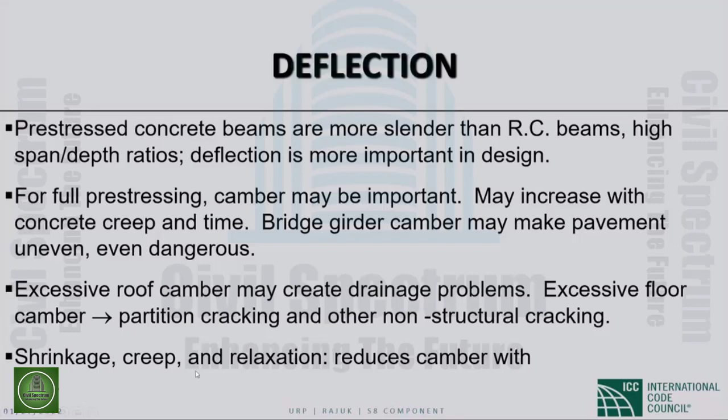So as I mentioned, shrinkage, creep, and relaxation reduce camber with time. So ACI does not give us any deflection tables, period. So we have to fall back upon something else.

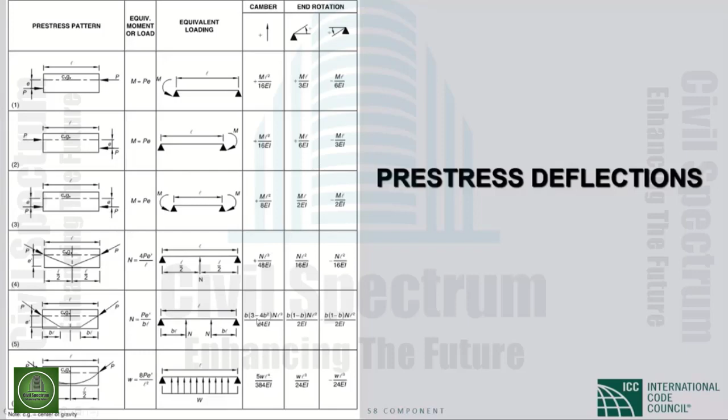This is kind of a 3 linear profile, and this is like a variable parabolic profile. So they really give us these nice tables - this is a camber table here. If I know the moment, I can figure out the camber easily. Very convenient. There's another table later on.

So I always use these tables in my practice. I give it to the students, and it not only gives you the deflection, the PCI tables give you maximum moments, maximum shears. I've never seen any comprehensive design aid like that. So these are very valuable - you can use them in your design if you want.

So after you figure this out, these are the camber, then you have to superimpose the other values, right? Those would be the dead load deflection, the live load deflection, which are not reflected here, but you can find them in other tables, and you need to find the net deflection.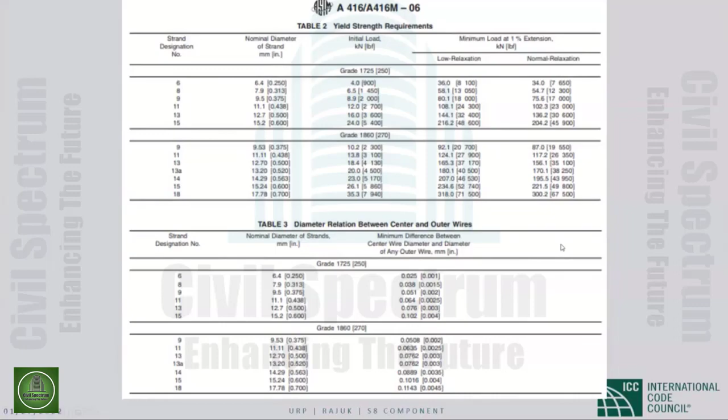Okay, so I know there are a lot of questions coming up. I have about, I would say, 35 minutes in my lecture time - well, maybe up to 20 minutes because I need to answer the questions. So I need to leave by 10:45 to attend my class at 11. But anyway, maybe I'll go through this example here, and then if I can just browse the other two.

This is kind of shorter, so let's tackle this one first. What I've done, I've taken a symmetric I-beam section - the area of concrete is given, and the area of pre-stressing is also given, so suppose they're known, and all the dimensions are given. The other information given is the F prime C, modulus of concrete, the creep coefficient, beta 1 value for the stress block, as you know, and the grade of the steel, and the 7-wire strand that are used, effective pre-stress. So I'm assuming the loss is taken care of here.

Moment of inertia of the section, which you can figure out yourself, concrete area, section modulus, and radius of gyration - you can estimate and figure these out. These are all based on gross area of the concrete. Pre-stressing is placed here, AP.

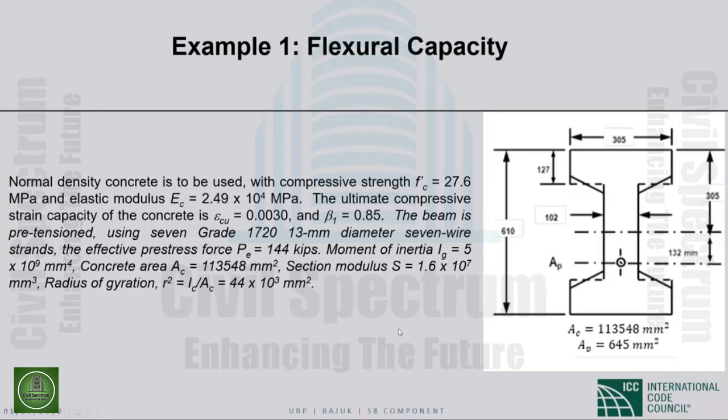Following back on what I showed you from the ACI code, the first ratio I need to check is this value here. The FPY, yield strength of steel, and the FPU, both are given. ACI says I must be more than that, so I'm fine, 0.86. Based on that, I can use one of the equations given in the ACI.

Steel ratio, well, that's well known now, right? The rho value, as you know, is the area of the pre-stressing steel divided by BD. This is same as reinforced concrete or pre-stressed concrete. So I solved it. I found a rho value of 0.0048, which is the steel ratio.

Then I went into the ACI equation for FPS, which is the failure stress in the steel, pre-stressing steel. So all the values are here. Gamma P 0.4 from that equation, Rho P I calculated, FPU is given, beta 1 of 0.85, and then F prime C of 27.6 megapascal plus omega, which is also given in the ACI. I end up with 1472.8 megapascal - this is the section of ACI that you need to pay attention to, the ACI 08 code. Then I figured out omega, called the pre-stress reinforcement index, which is very simple, rho FY over F prime C. Fy is given, F prime C is given, so we get 0.26. I hope it's clear so far.

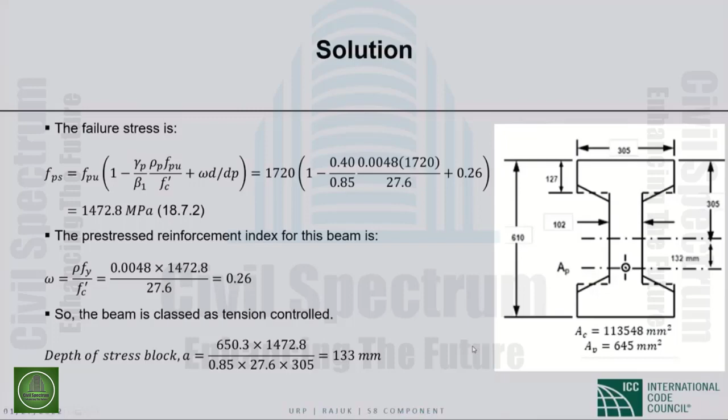So as you know, in the T-beam, we divide this into two sections. We take the overhanging part of the flange, which is this part here, then we take the web part. We take them separately, find Mn1 and Mn2, then superimpose them to get the combined capacity. So that's what I did here. This is the web part - we call that APW, same FPS - and that's the part due to overhanging. This logic is taught in all undergraduate classes, so I'm sure you're aware of that.

That's the overhanging part - that's the force from the overhanging part. Subtracting it out from the web part, or the overall part - this is the overall capacity, AP, FPS, so this is AP times FPS. Subtracting out the flange part, we get the web part, which is 345 kilonewton.

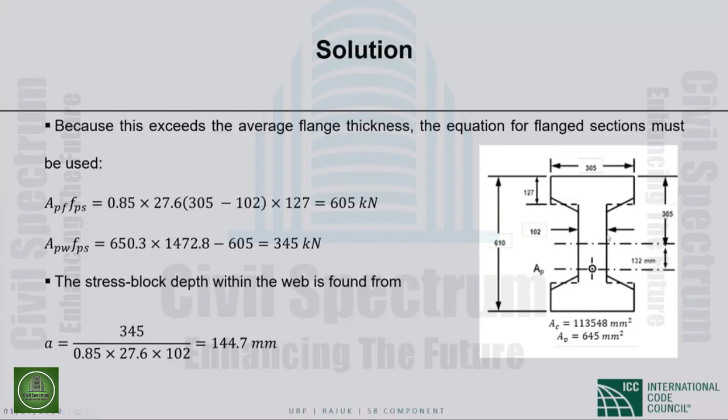Then we recalculate the stress block in the web, which is based on AP, FP over 0.85 F prime C BW. Now we're using BW because we're in the web now. The web width is 102 millimeter. Moving along here, that's the moment strength.

Now we have Phi-Mn1. This is not Phi-Mn. Phi is not applied here. This is nominal flexural strength. Phi should be applied here. If it's tension controlled, Phi should be 0.9.

This is the moment from the first part, and this is the moment from the second part. Note how I use the 127 here for the flange width and the different one here for the web width.

And the total capacity is 352 kilonewton meter. So that's the flexural strength, ultimate flexural strength. And what we do is we reduce it by Phi factor, as you know.

Then we can compare that with M sub u, which is the ultimate moment in the span. Then we can figure out if Phi-Mn is more than Mu, the section is safe. If Phi-Mn is less than Mu, it's unsafe. If Phi-Mn is exactly equal to Mu, you don't want that.

Because you want there will be a little bit of reserve strength in there. So try to stay away from when they're exactly equal, because there can be so many uncertainties in load or the strength or the other issues which are inherent in concrete.

I think that's the end of this example.

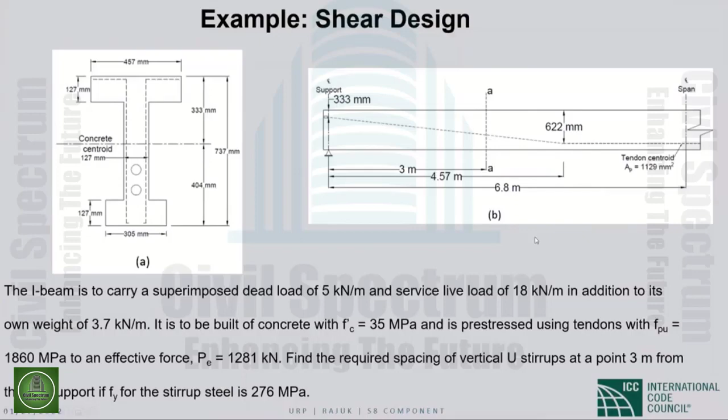I cannot use that one because I'm calculating shear capacity here. So it's a very simple matter of triangle from trigonometry, which I did here.

So I found the dP now at that point at 3 meters from the support. And the ACI code says that I can assume the depth in shear calculation to be 0.8 of the overall height. Remember the equation I showed you before from the ACI code? So that's reflected here. I took that, and that value is 589 millimeter.

Then I went into the two equations, the flexure shear crack equation and the web shear crack equation, and calculated them separately. I'll probably rush through here because I'll take about 5 more minutes here.

So found FPE, which is at the level of the pre-stress, the stress here. Make sure to use effective pre-stress because we are designing for the service condition, not for the initial condition.

Then I figured out the moments and shears. This is old information. You can use whatever way you want. You can use a spreadsheet, or you can use code values. These are equations for the moments at that point.

So I found the dead load moment, found the shear value at that point, then found out FD, which is the stress at the bottom of the beam for the self-weight moment, which is MC over I.

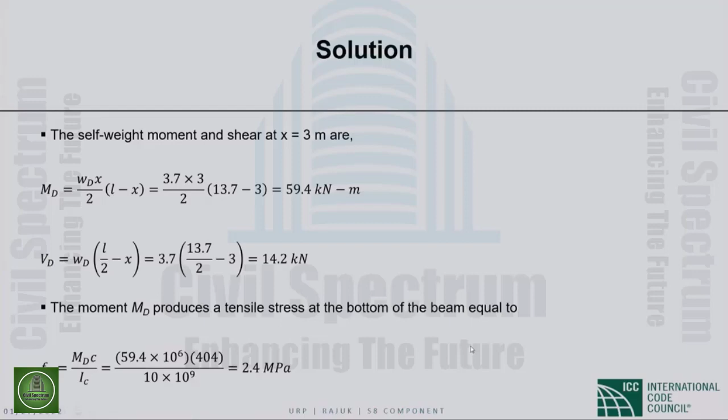Then found out M cracking. Probably just show you the equations here.

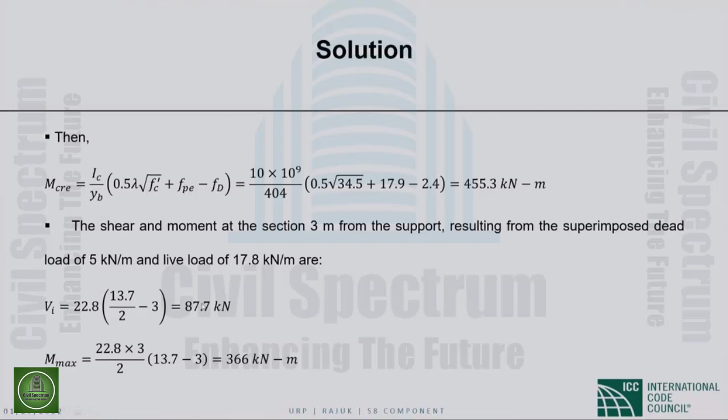Then shear and moment at section 3 meters from the support. We figured that out from there. Applying the live load and the superimposed load.

So I found VCI based on that. So that's the flexure shear capacity of concrete. This is only concrete, no steel is involved in this. And then I went to the web shear crack equation, which is VCW.

Again, using PE, I found the centroidal stress and tried to show the vertical component of the pre-stress. Remember, I told you that would be reducing your stress if you want to do that. Then I found VCW.

Something important here: VCW is 389 and VCI is 145. Of course, this one controls, right? The lower one controls, so I assume that to be my governing concrete strength, VC.

I used number 10 stirrups as a first approximation. This is the area of the 2-leg stirrup. Now if I use a double T beam, of course it may be 4 times, so you have to be careful to sum up the area of the stirrup with the proper number of legs considered.

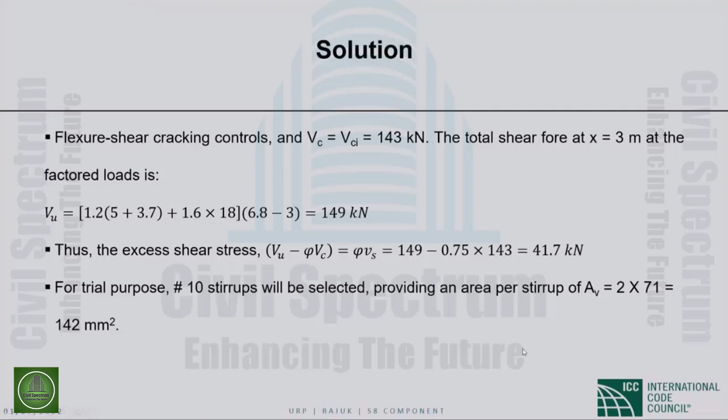Then I used the stirrup spacing equation. I used a phi factor of 0.75, not 0.9, because I'm designing for shear according to ACI, and everything else is given. I found a spacing of 414.7 millimeters from the strength equation. Then I checked the minimum web steel, as I mentioned before—this is the second equation in terms of S, the unknown spacing.

This is where you spend most of the time doing all the detailed checks from ACI, but there's no way around it. Sometimes that takes more time than doing the actual design of the steel. So based on solving this for the minimum, I get a spacing of 887 based on the minimum web steel criteria.

Additional criteria is that I must use the smaller of 600 millimeters or 0.75H. Comparing this one with this one and that one, we see that this one controls—so my strength control, this one did not control. So I used a spacing of 414 millimeters.

And number 10 worked out fine. If that doesn't work out, then you have to go back and change the stirrup size to be within the allowable limits.